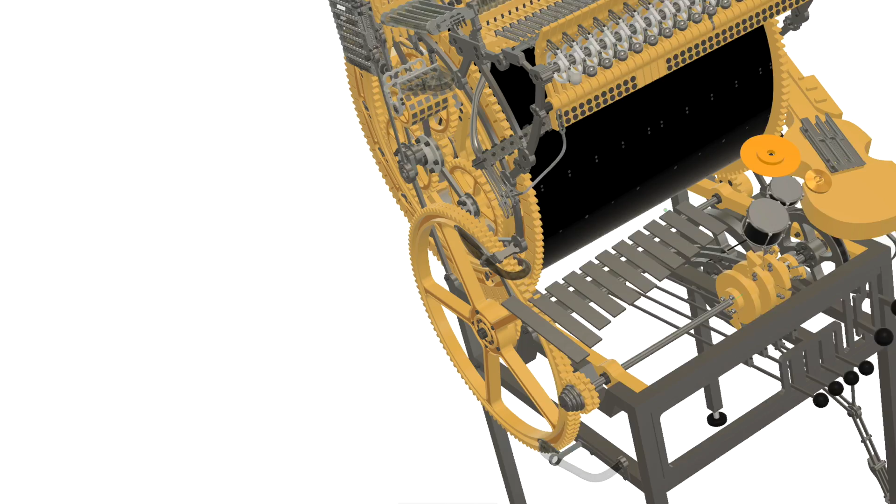Dropping the ball precisely on the Marble Machine X is a more complicated problem than what you might think. My goal with this episode is to explain as clearly as I can the premises for this engineering problem and give you a full background of the requirements for the marble release on the Marble Machine X.

I get a lot of questions from viewers that tell me not everyone is on board with some of the very basic functions on the Marble Machine X. I hope that no one who has been watching this video and paying attention will be left in the dark afterwards.

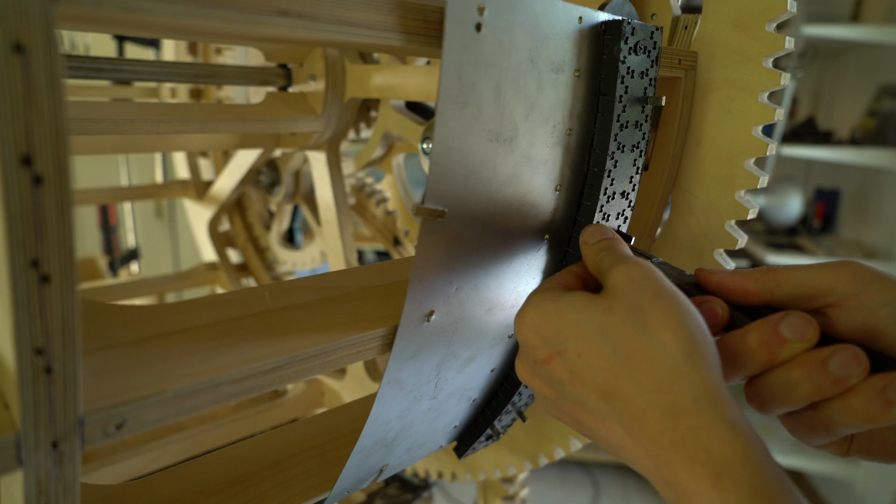By the end of the video, I will test for the first time if the Marble Machine X can play tight music. This is a make or break moment. If it works, we're basically on the home stretch. If it doesn't work, it's back to the drawing board.

Later in this video, I will also build the prototype for this release. But before we go to that, I want you to really be primed in your understanding of the problem. So let's start right away by taking a thorough look at the design requirements for the Marble Machine X marble release system and the solution that makes dropping the ball precisely possible.

Marble release design requirement one: the marbles must be able to hit the same exact point from two different drop positions in order to repeat the same note in fast succession.

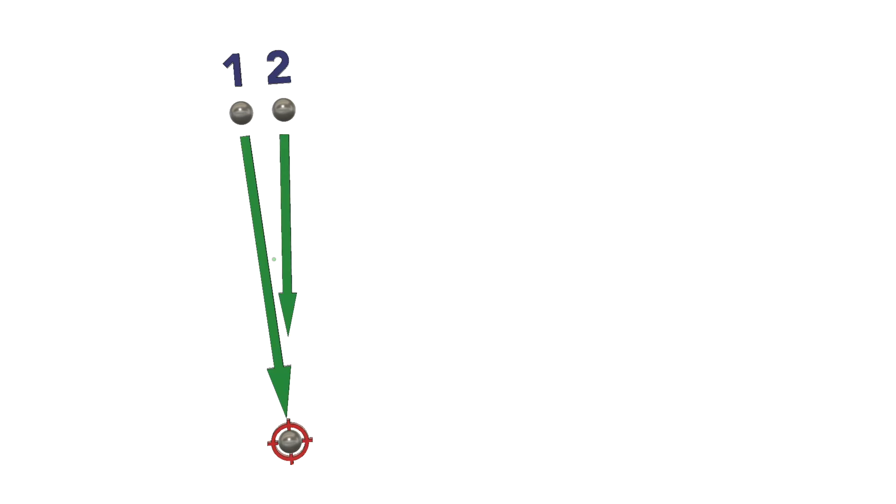Da-dun, da-dun. On the Marble Machine X, we have doubled the channels, which means we have 38 mechanical channels feeding marbles to 19 sound sources. This means we need to drop marbles from two different physical locations onto one hit point.

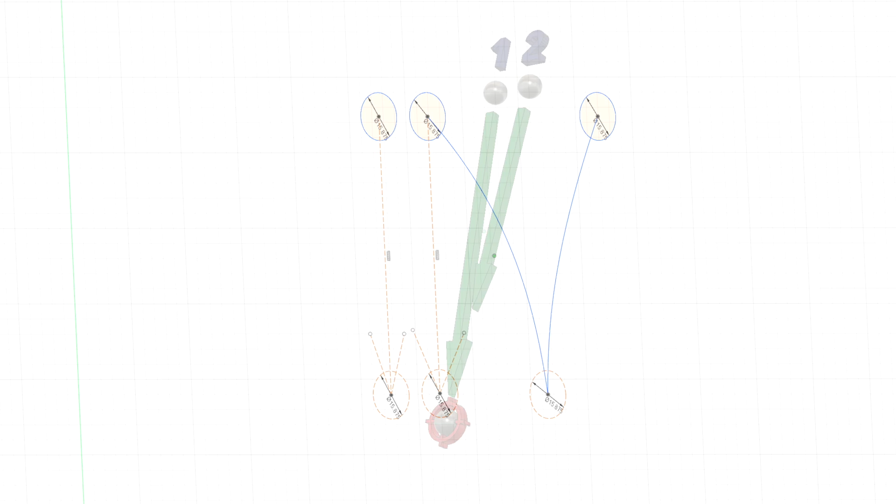This also means we can't drop the marbles straight down. We need to create a controllable arc for the marbles to fly at an angle, so they can start from two different physical positions and hit the same point. This is because we want to be able to play the kick drum or the snare drum or the vibraphone - pling pling, okay?

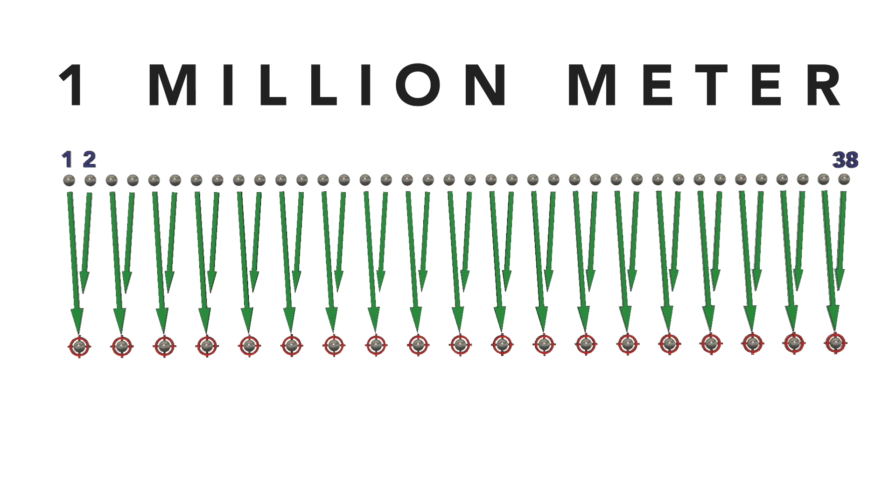Requirement two: the two drop points need to be as close to each other as physically possible. 38 channels is a lot, so in order to not make the Marble Machine a million meters wide, we need to keep it tight.

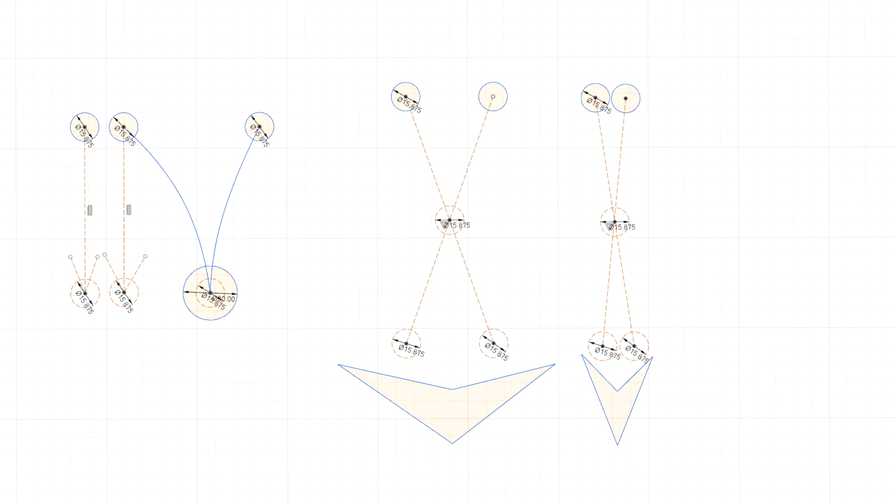Also, when we release marbles from two different drop positions, they create a kind of X pattern when they land on the same point and then bounce off in different directions after landing. To keep this X pattern as tight as possible, we need the drop points to be tight. This makes it possible to build smaller funnels to catch the marbles, which is a good thing.

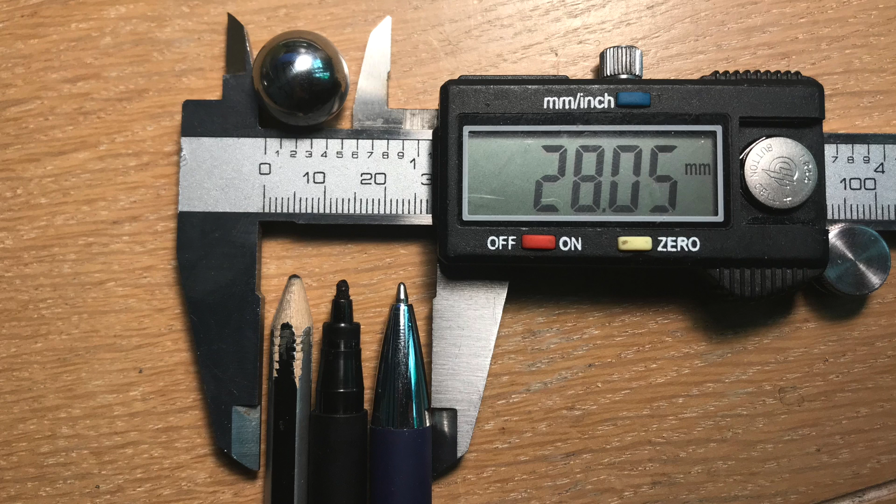Requirement three: because of the available space, the marble release cannot be wider than 28 millimeters, equivalent to 3 pens. But smaller is better, because there needs to be room around the marble releases to adjust them sideways. So we decided to try to stay within 21 millimeters, or 2 pens, for the width of the marble release.

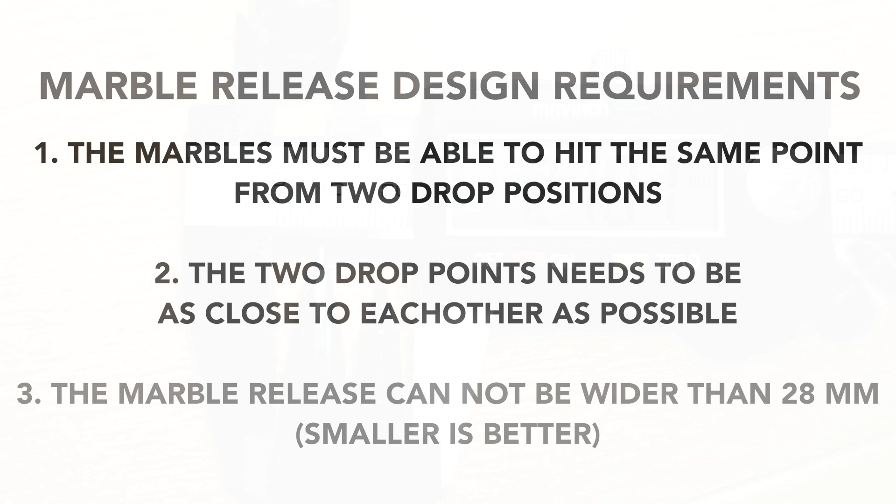Requirement four: the marble needs to fall with the same arc and timing regardless of music tempo. This is tricky to achieve, because when the machine plays slow, the gate that drops the marble opens slower than when the machine plays fast.

Five: the release must be adjustable in every direction to precisely control the marble hit points. Six: the release must be adjustable to control marble timing to make the music tight. Seven: the solution must be manageable to build and assemble from a time and cost perspective. Eight: repeatability - the marble must drop in the exact same pattern every time. Nine: it must be durable and reliable for the World Tour. And ten: it must look cool.

Yeah, that's a lot of requirements. Every single one of these ten items on this list is a must-have, and this is where our journey begins.

This is the first serious marble release prototype for the marble. Okay, let's try that again. It was supposed to work like this, with a fork in the front. The fork's position is adjustable here. The spring tension is adjustable here. And the fork is good for tuning your instrument.

Let's analyze this to see how it does against our list of requirements. Can the marbles hit the same point from 2 drop positions? Yes. We can put these points close to each other and hit the same spot. But look in the back here. This is not 28mm each. They take up a lot of space. So the third channel coming here has nowhere to go.

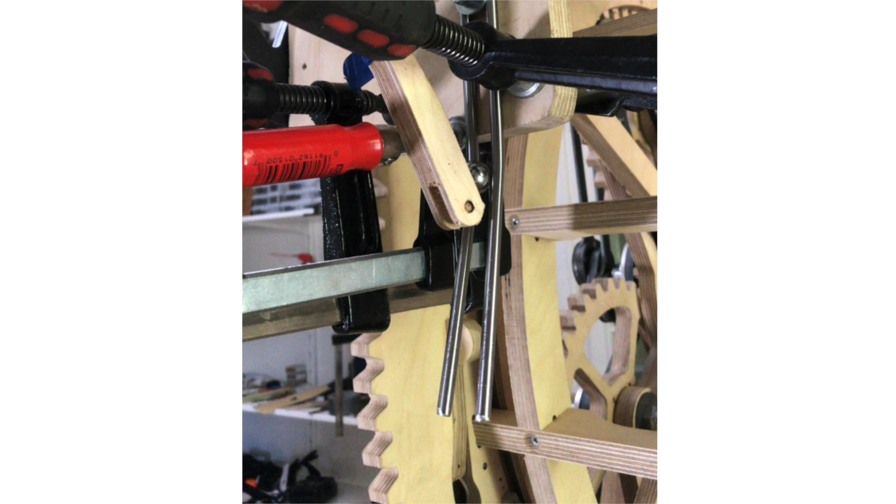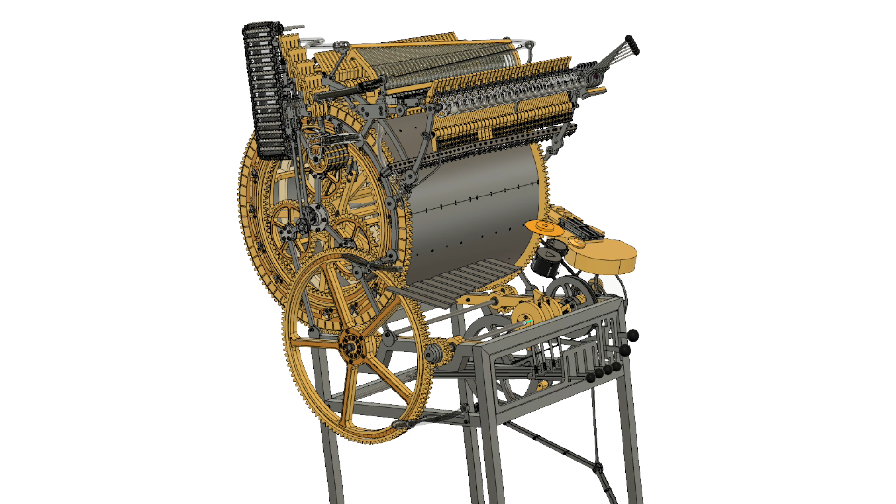So now the work with designing a completely new vertical marble drop started. I started work with these bendable metal rods, and as you can see here, I measured how consistently they could hit the same point. And dropping 20 marbles, they all hit within a circle of 5 millimeters. I was really excited. And these are my first CAD designs with the metal rods for a new marble release. And I also took into account with these designs how to reach different instrument hit points. The obvious disadvantage with this design is that the marbles would be lost in a forest of metal wire.

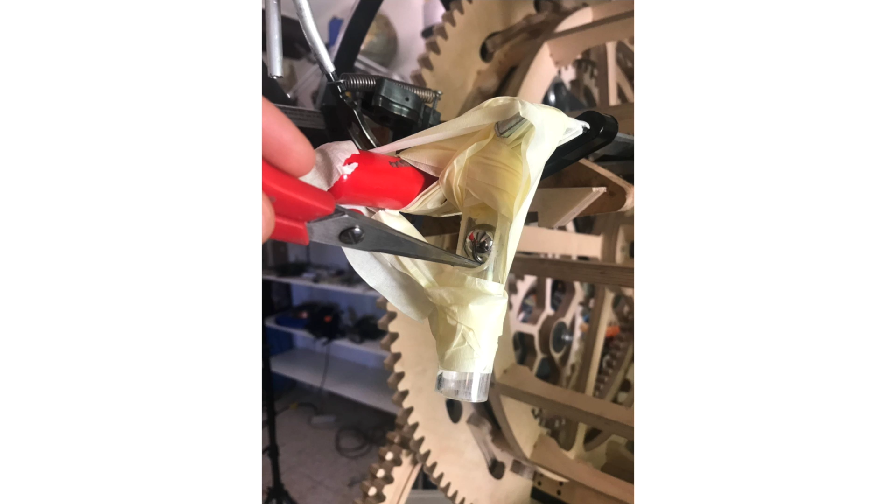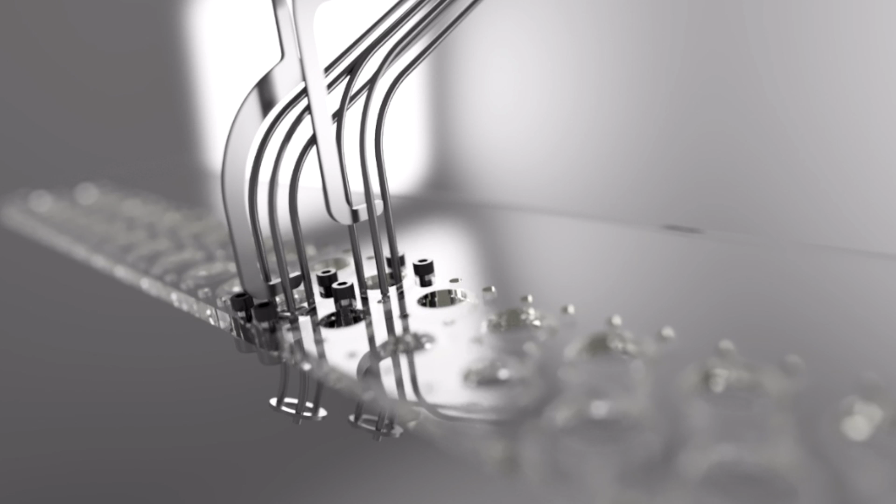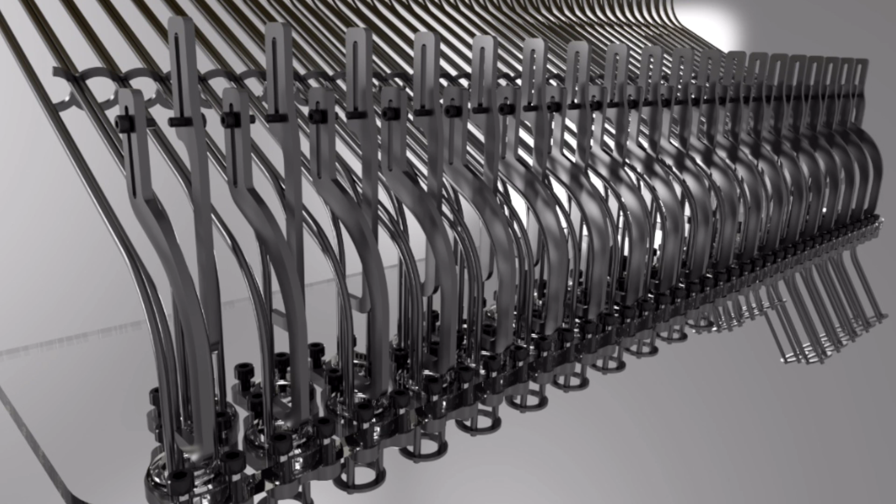Chris, the project manager, had a completely different idea that he presented. Chris suggested to drop the marbles from within a PMMA pipe, attached and adjustable through a ball joint, like a nozzle kind of. And then he sends these beautiful renderings. And what I really took impression from these renderings was how clean everything looks. And it's a little bit of a false picture because, as I said, the instrument drop points are not in a straight line, so it could never look like this on the real Marble Machine X, and it didn't really work. But seeing Chris' renderings of this idea made me inspired to try to tweak my idea further.

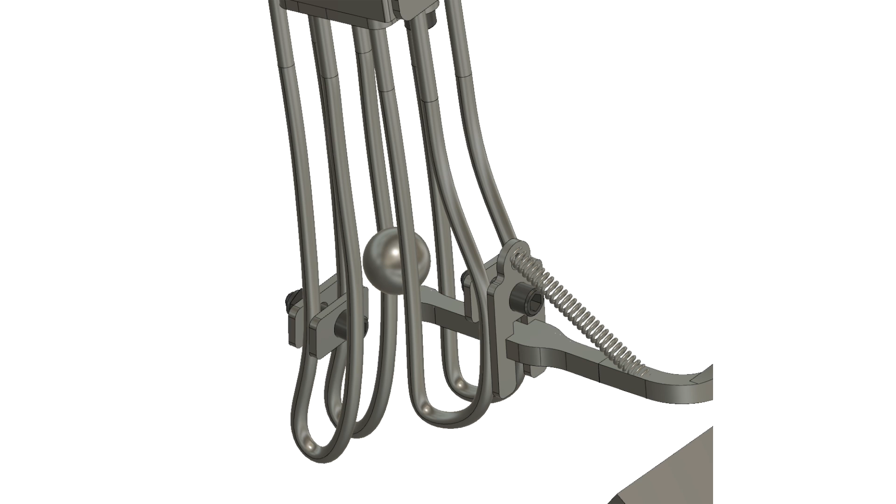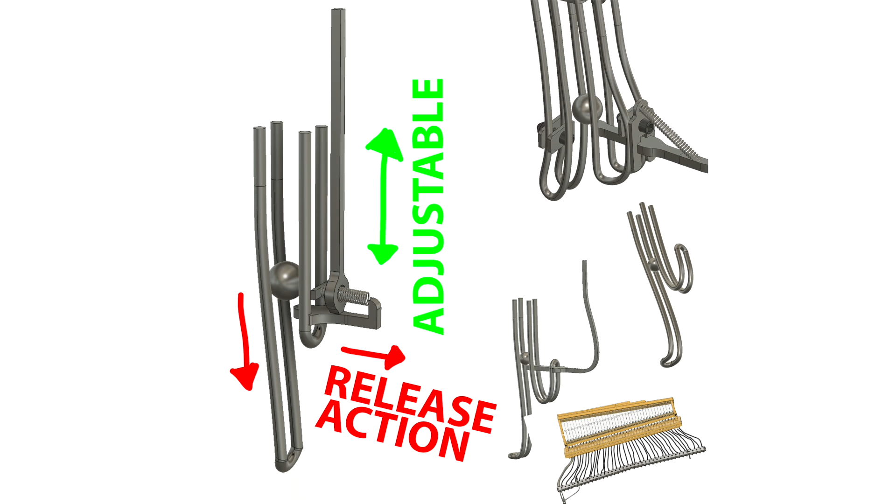So together with feedback from the team, I went on a design crusade to try to make this thing more elegant. There's a lot of functionality that this solution needs. The lifting finger needs to be guided, there needs to be some kind of spring to really keep it at the exact same position, and there needs to be registering so the marble always sits perfectly. I tried to design it like a 3-legged stool so that the marble would stick between 3 points.

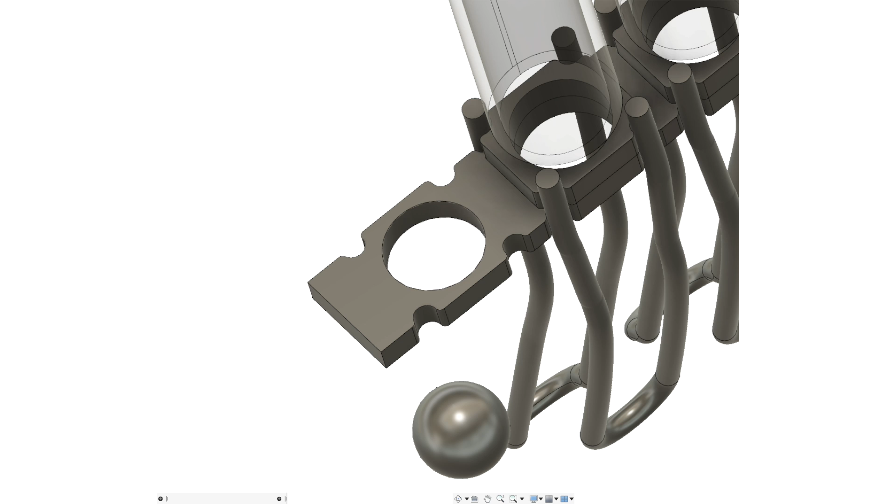Then I started to work on the transition bar that connects the PMMA pipes to the metal rods, and here you can see how it's built up. This is designed to make the metal rods easy to adjust. So if you see here, there's a side that you can push with the M6 bolts onto this part, and with the friction the metal bars will be really held in place. But if you loosen up the screw, you can easily adjust it.

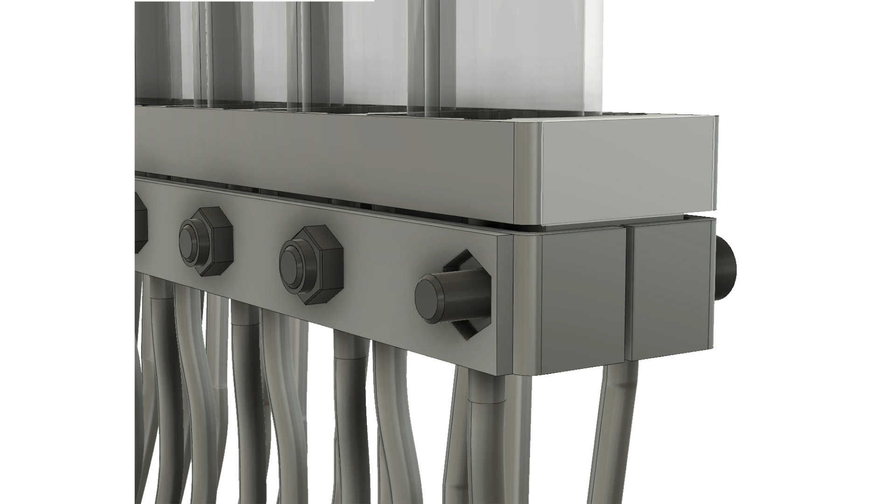And on the back side of this rod, I made a hex shape, so it's a one-hand operation to adjust the rods. And this is a really nice solution from Chris in his design for how to include the adjustability. By having this slot, you can adjust the marble drop like 30 to 40 millimeters height-wise.

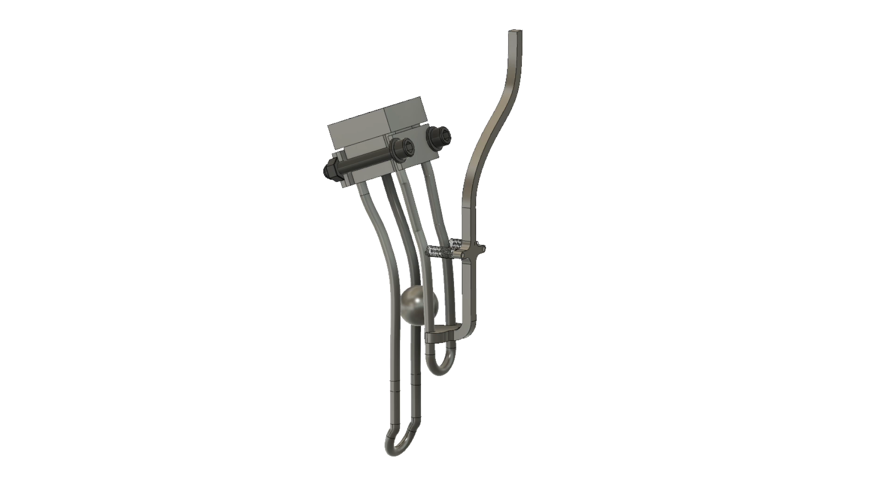After several rounds of simplification, we landed on this, and this uses 3 parts and 2 springs. No welding, no tapping, no nothing. So it's quite amazing that we went from 28 parts to 3 parts. And that was all thanks to Chris, who forced me to better my original idea from this to this. Let's look at the results.

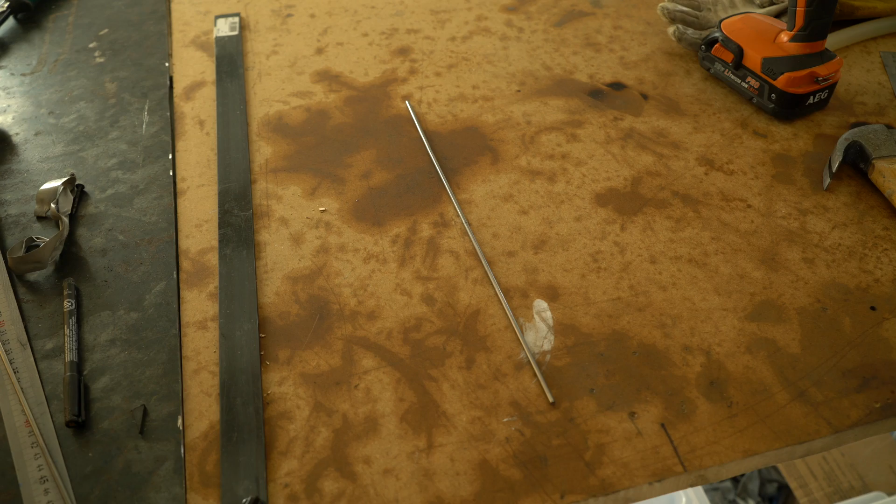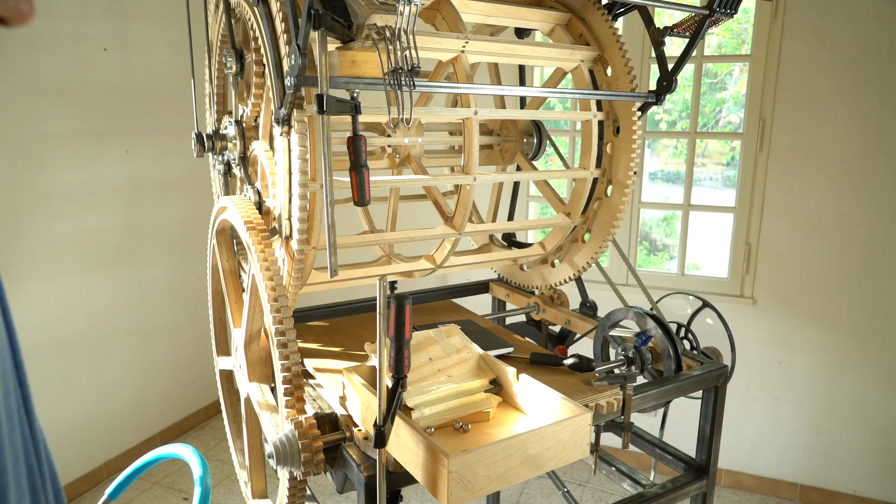Love that sound. Listen to this. Chris has told me that I'm not allowed to chase perfection because it doesn't exist. I just proved him wrong.

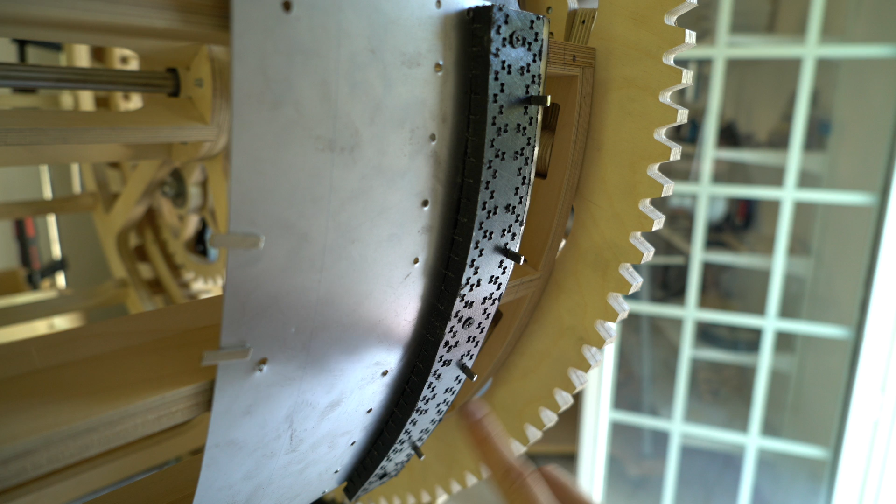Okay, this is where the real experiment begins. I'm first going to measure consistency in the marble drops. So I put 4 programming pins on one channel, and I'm gonna sync them up with the internal click. Just so you know, the Marble Machine X is not going to be played with a click like this. The click is only there to get consistency in my experiment.

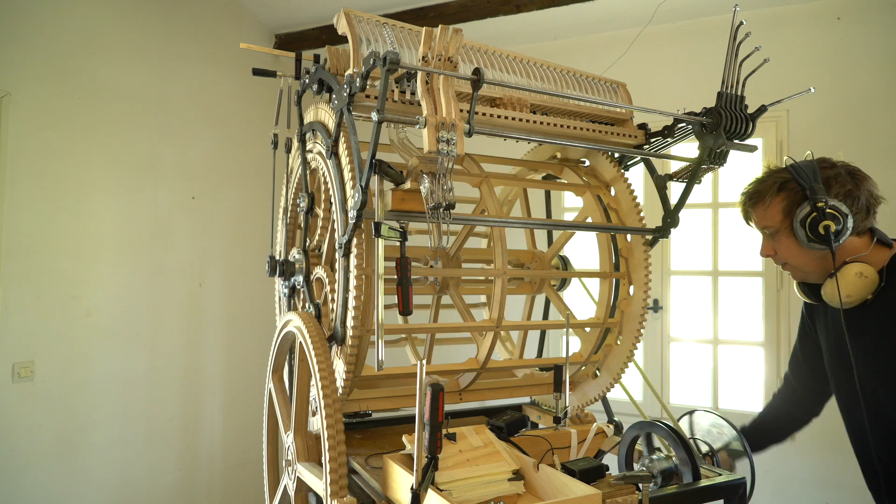I'm using 120 BPM, so if you hear a difference between the Marble Machine's click and the computer's click, don't worry so much about that. That's not what we're measuring right here.

Also, I'm sure you noticed that the marbles are not falling on top of the click. That's also not what we're measuring right now. We have an adjustment system to sync the marble drop with the click later. That system is not in place yet, and it's not what I'm measuring right now. So don't worry about that.

So I record this into 2 audio tracks. This top one here is the physical Marble Machine X click, and the below one is the marble drop plywood plate. Let's listen. At this stage, the plywood drop is not synced with the click, but that's not what we're measuring. So I'm syncing up the first hit of the marble drop with the click. Here you can see it's sample accurate. And then we're playing it again.

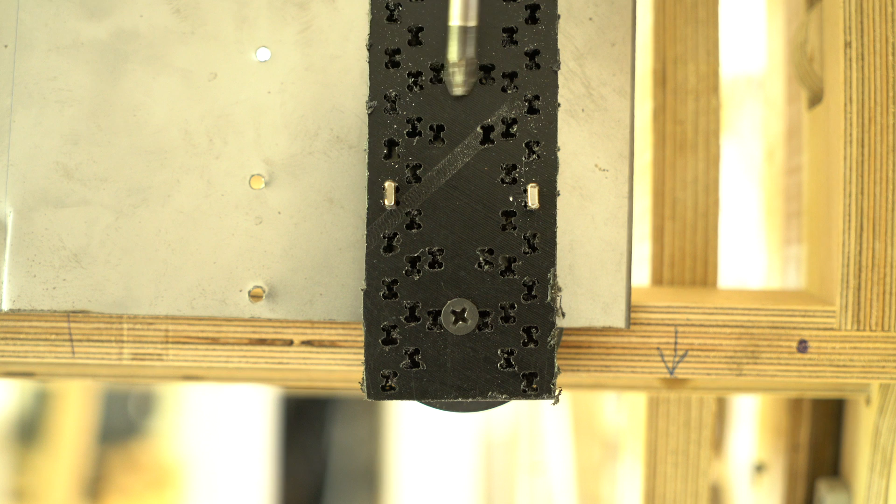Now I'm attempting to get 2 channels to drop a marble to hit at the exact same time. So you can see here I'm putting programming pins next to each other. So this test will really tell us if this marble release solution is valid or not. This group is channel 6. This group is channel 7. The outer line here is straight notes. The middle line here is 32nd offbeat notes. And these 2 out here are triplets together with the first note from the straight notes.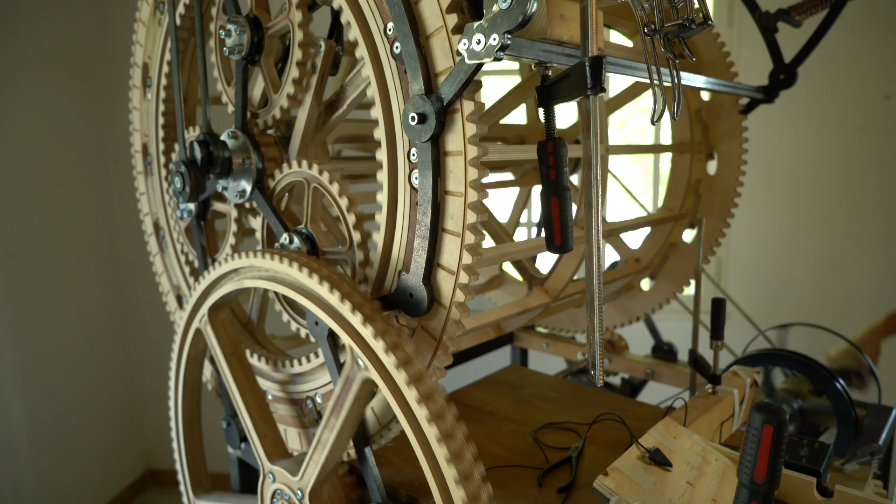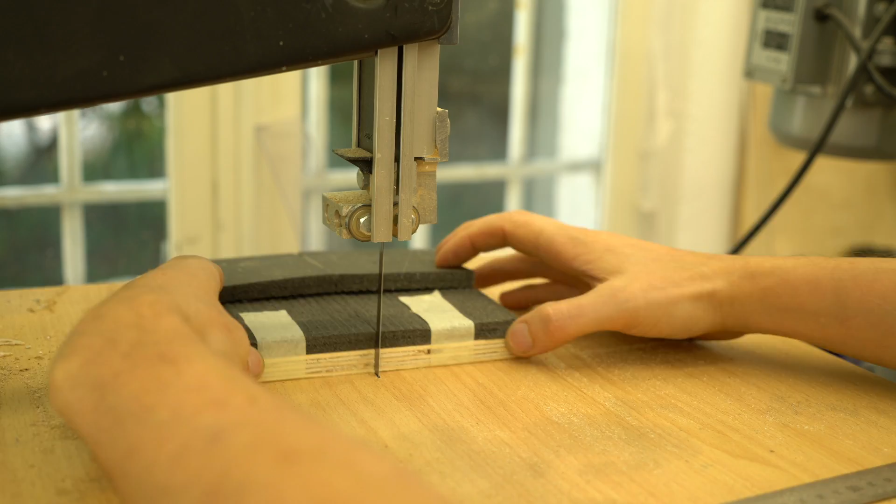Simultaneous marble drop test 1 without any adjustments. I realized immediately that I should split the hit surface and record 2 separate channels to really be able to analyze the time difference between the 2 marble hits. So I aimed each marble release at their own plate.

And I put on a new contact microphone, so now I'm recording the click plus marble release 1 and marble release 2 separately. First test, double drop, and no, that Wintergatan sign is not going to be there on the final Marble Machine X. Checking the audio recording. We see very clearly that the second channel is earlier, but it's consistently earlier, which is exactly what we want to see. So I'm trying to compensate for this by raising the drop point for second channel.

And here you can see why I want a one-hand operation on the real thing. This is the prototype. So here I'm really lacking one hand when I need to hold the lock nut in the pliers with my left hand. So that's why I made that hex shape that I showed you earlier. So I can use my right hand with a hex key and my left hand can hold the marble release. Second try.

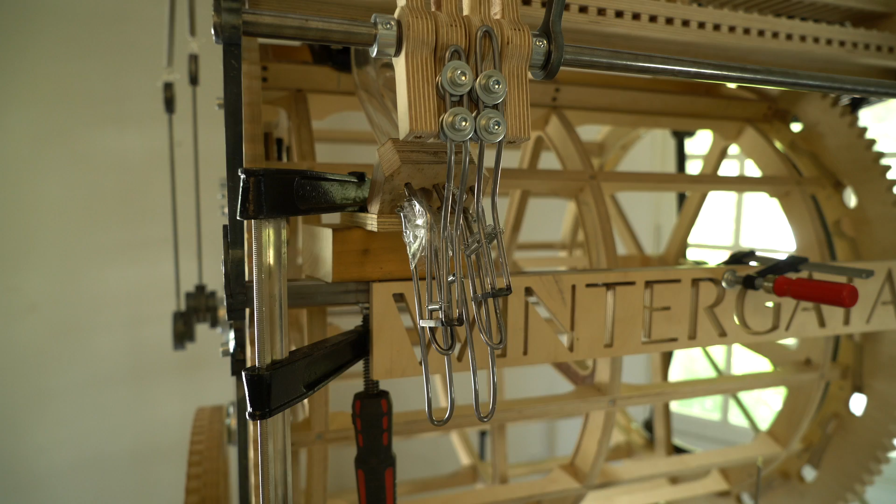Third try, and with this zoomed in picture, you can clearly see that there's quite a lot of shaking of the top of the machine. And I have several improvements to prohibit this for the future, because that's important to fix. Second channel, still clearly early, so I'm lowering the resting point for the first channel. Fourth try. Less early, but still early.

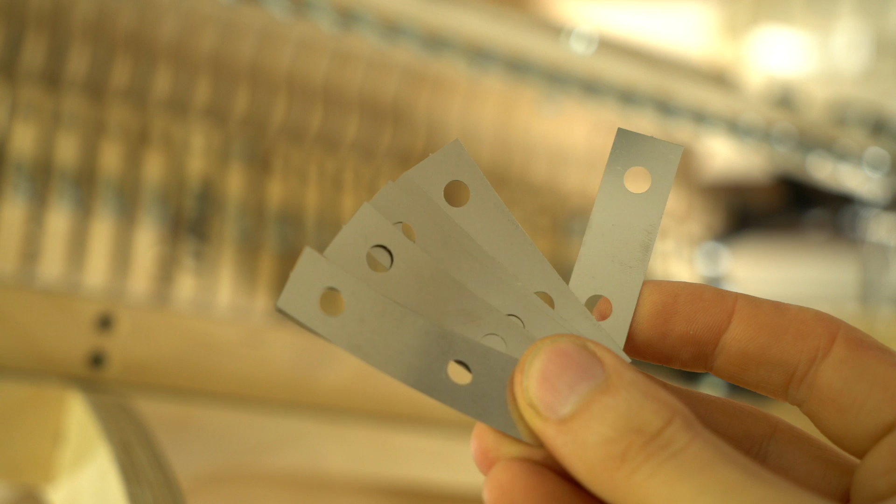It's time to look at another place in the machine where we have designed adjustability for this kind of issue. If you look carefully on the 2 registrators here, you can see that the left of the 2 is moving before the right, which is exactly what we would expect since the second channel was early. We have a fix for this. If I perhaps disappointed some real engineers with the metal bending earlier, I hope I can gain back your trust and that you can forgive me when you see this solution.

These are specially made laser cut 0.1 thick shims. So these fit in perfect under the registrators. So here I'm introducing 5 shims for a spacing of 0.5mm to make these 2 channels activate simultaneously. Fifth try. Well, that sounded very unison. Let's check the audio recording. Before the shims, after the shims. We're getting there, but I'm not done tweaking this yet.

So when designing this marble release, one of the most essential things was that I wanted the marble to end up in the same position, very repeatable. So if I drop one, this one should be in the very same frame. So let's drop some more, and then we can compare the frames. First marble was here, and second, and third, and fourth. Not a big difference. Sixth try at 25% speed.

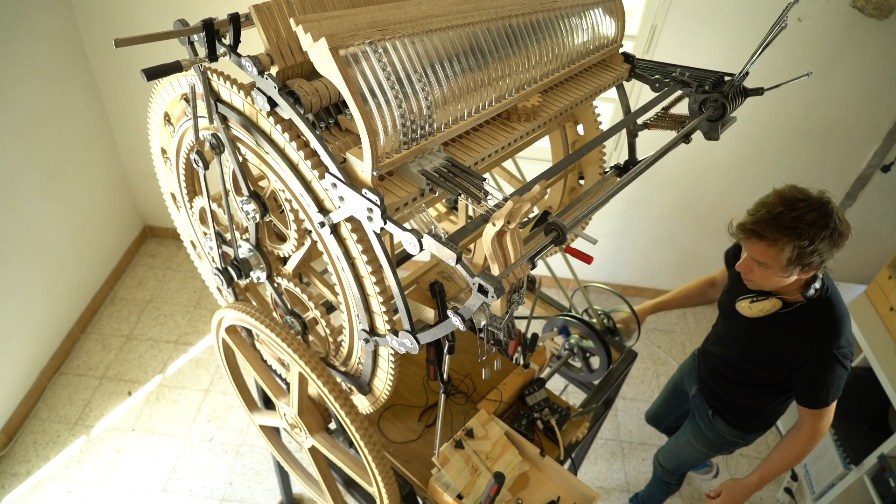At this point, I realized that one of the legs of the machine was hanging in the air. You can see how loose it is here. So a couple of turns with the wrench and the machine is so much more stable. This is the 8th try. And let's check that audio recording because that sounded correct.

Okay, that's unison. Let's check the milliseconds. What do we have on the first one? 3 milliseconds difference between the two marbles on the first hit. Let's check the second hit. Where are you there? That's tight. That's 1 millisecond. And let's check the last one. 2 milliseconds.

If you're used to work with music and you know about transients and stuff, you know that this means that the Marble Machine X can play tight music. Let's take a moment for that to sink in. The Marble Machine X is tight. Ow.

Diggy, diggy, diggy, diggy. There. 1, 1, 1 is... I'm not really used to these patterns yet. I'm going to be fast at this later.

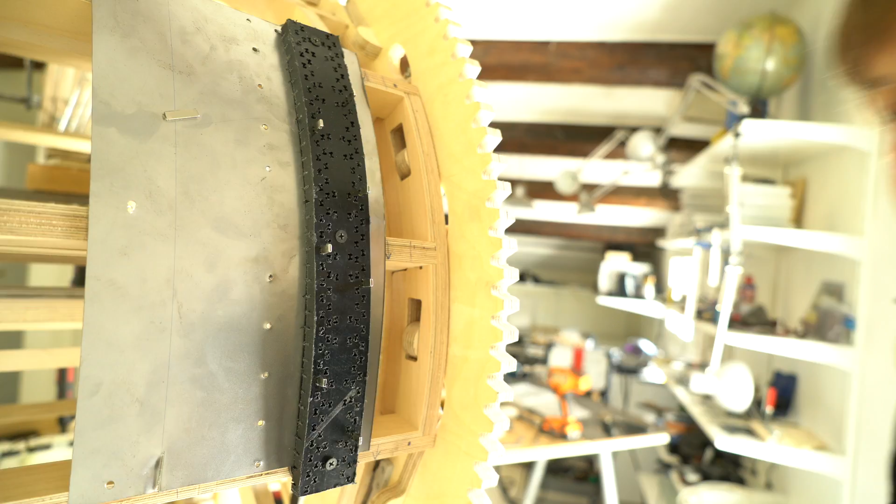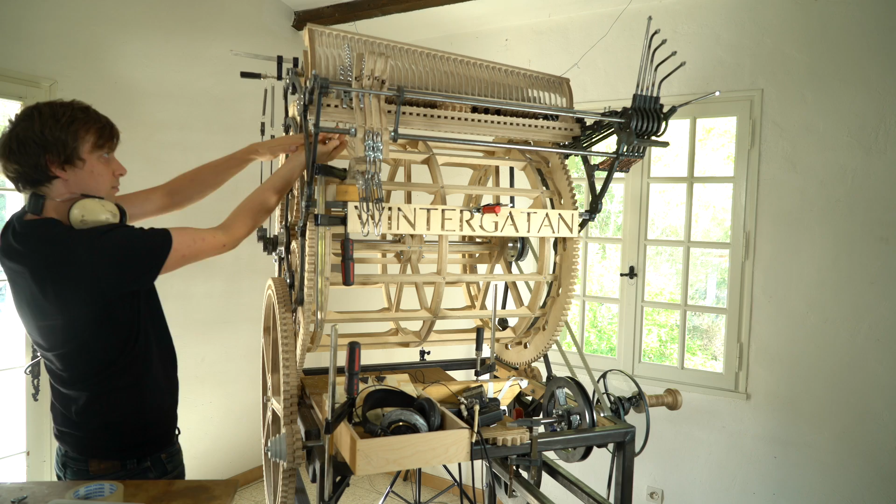So just for fun, I'm going to EQ one of the channels like a kick drum and the other channel like a snare drum and EQ the click as an offbeat hi-hat. First room sound. Contact microphones, no EQ. Add EQ. Add delay. Add matchbox shaker. Add guitar.